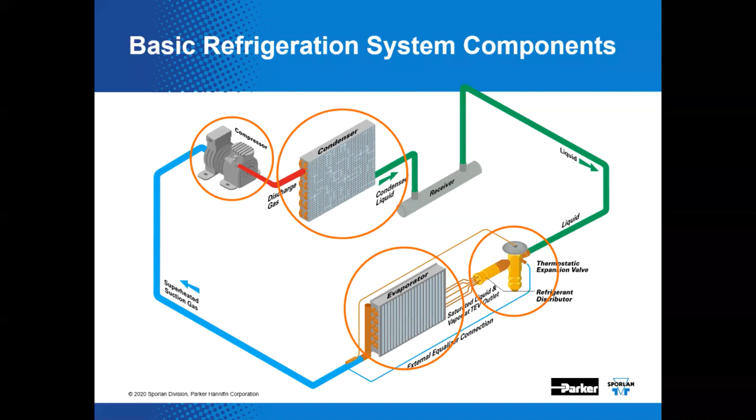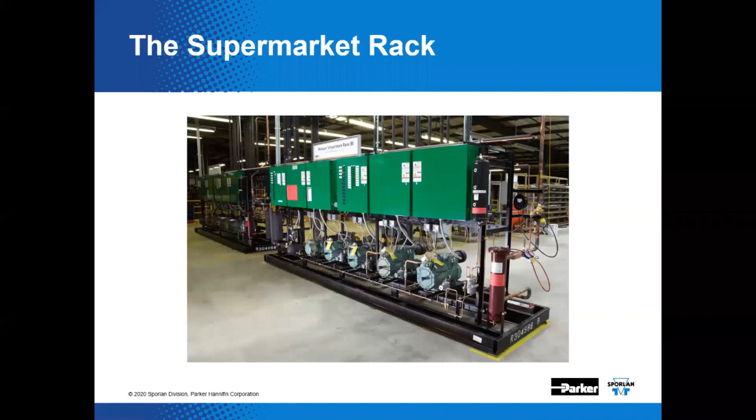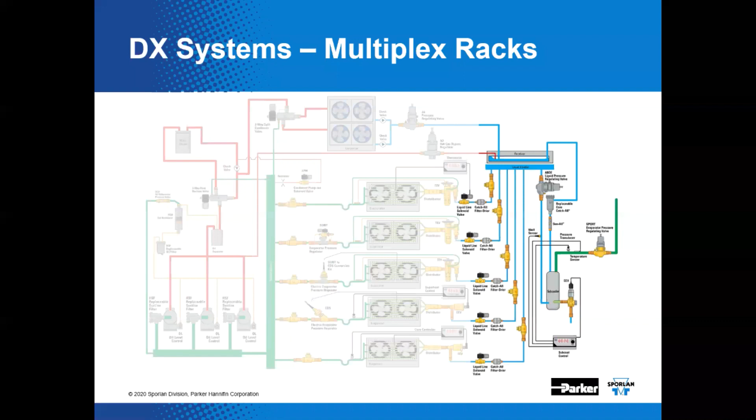Here again is that multiplex system. And right now, we're simply going to highlight the part of the system that we plan to discuss today as we move on to discuss liquid line components in more detail. Downstream from the contaminant control, and here I might go ahead and use the laser pointer, we have a mechanical subcooler. Even though in this particular version we're showing an EEV in the circuit, the term really refers to the mechanical nature of the heat exchanger used in this subsystem and not the flow control device.

The rack's mechanical subcooler is typically a circuit on the rack or another rack at the supermarket. For increased efficiency, the low temp rack will be externally subcooled by a medium temp rack. Note that medium temp rack's not shown in this diagram, just to simplify. But again, using that laser pointer, see the connection to the EEV from the medium temp liquid header, and see the connection from the evaporator pressure regulating valve to the medium temp suction here. This allows the medium temp compressors to help with the low temp load.

The medium temp compressors are typically more efficient compared to the low temp compressors. This is a compression ratio or pressure ratio thing. Most medium temp systems that utilize a subcooler are self-subcooled, as there is still a benefit to the subcooling effect even in this situation.

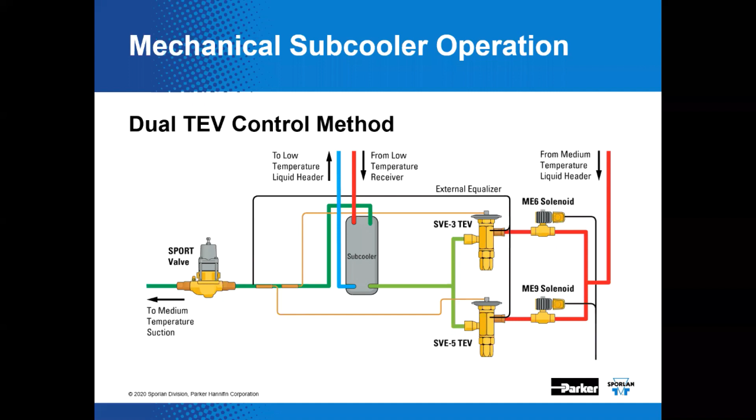Yeah. So I think you could actually throw off valve sizing if you went subcooling too far, too low. I tell you, from what I've seen, 50 degrees seems to be the low end of what makes practical sense in many instances. But there may be times where there's some benefit to go lower than that, but I think you've got to be careful with the selection of all the components that are involved.

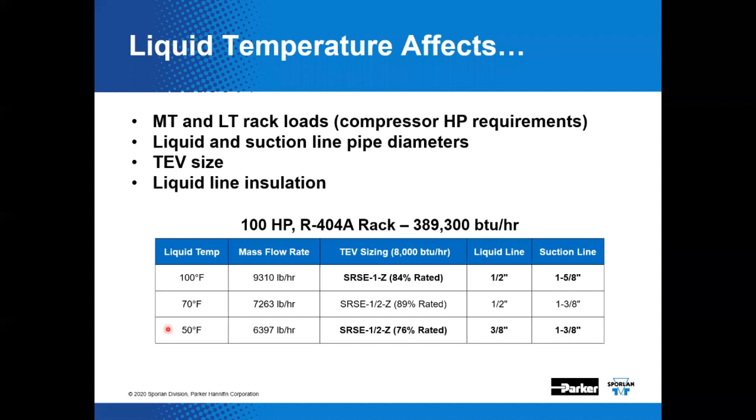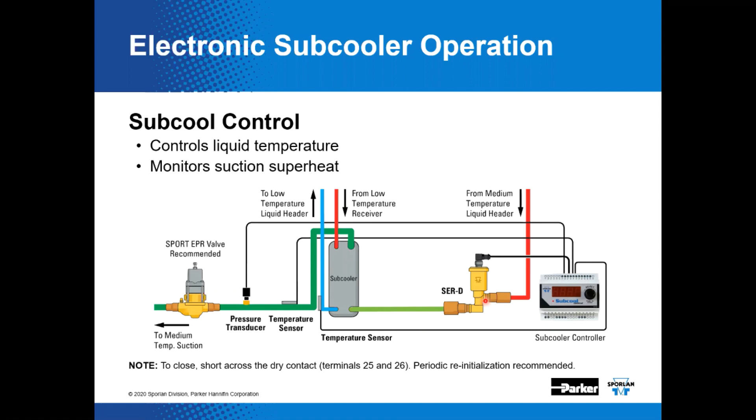There are systems that utilize a CDS in place of the SPORT valve and a mechanical TEV in place of the SER. Generally speaking, you wouldn't necessarily have a CDS coupled with an SER, but I suppose one could do that if you were so inclined.

There's a question: could you have more than one subcooler in a loop? And why would we ever want to do that? The only reason it would make sense to do that is if you did not have a large enough subcooler available to meet that need, and so you have to put two of them in series or two in parallel. But that's really not what we see in practicality. In general, it's just one unit.

And one other question: we're showing liquid from the medium temp rack to subcool the low temp liquid. Could you just not use the low temp liquid to do the same thing? And in fact, we mentioned that earlier. Absolutely, you can. What you end up doing, though, is working those lower pressure, lower temperature compressors to do the work. And generally, they might not be as efficient as the medium temp versions, and you don't get the same kind of cost savings. But functionally, yeah, you could do that.

Sure. So it's all about cost savings using medium temp instead of the low temp, whether it's using low temp suction gas. Well, it's about cost savings and about stable control. It's a combination. Okay.

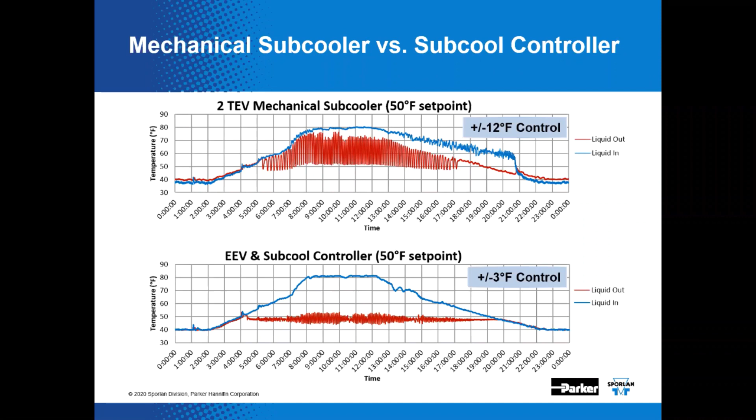Make sure you have the right TEVs that are working properly. Make sure you're pulling the right solenoid on at the right times for the right capacity. And then check that subcool control. And then for the liquid returning back to the compressors, obviously that's a superheat issue. Go take a look at those EEVs and TEVs, and then troubleshoot those as you need to make sure you get it back to proper superheat.

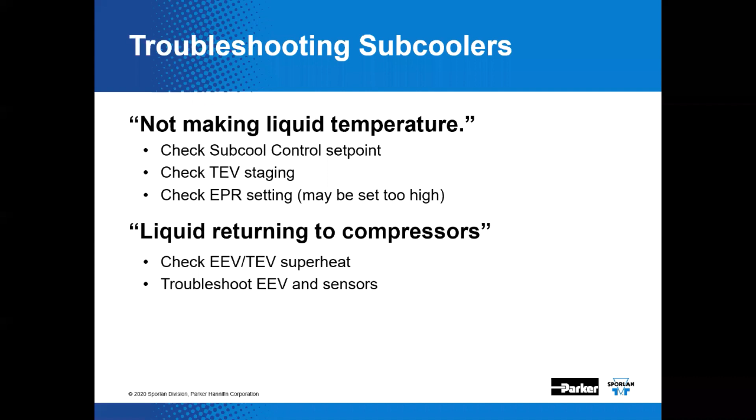Sounds good. We're moving on to the next phase of this tech talk, and here we plan to include a few comments regarding something known as the Liquid Pressure Regulator, or LPR. It's installed in the liquid line to provide consistent outlet pressure to the TEVs. With a steady supply of stable temperature and pressures, setting those mechanical TEVs at the refrigerated case becomes an easier and more reliable proposition.

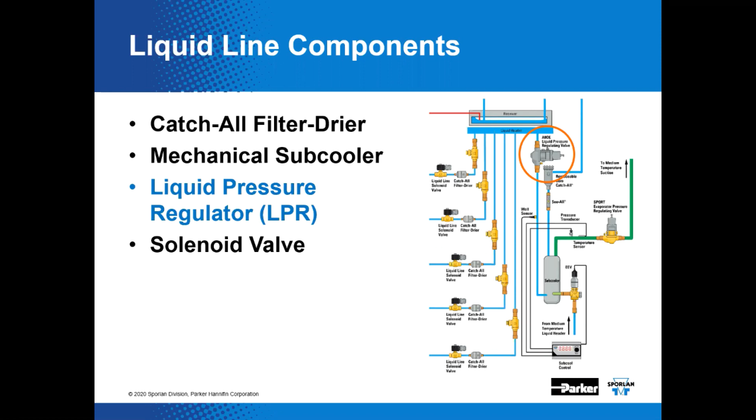You're stacking the odds in your favor of the thermostatic expansion valve's ability to control the desired superheat at the outlet of the evaporator coil, presumably where the bulb and equalizer have been installed, and hence have better stable overall control. There is the LPR indicated there. And sometimes that's referred to as a liquid header pressure regulator, as we'll learn why that might be the case.

This is an overview of the purpose of that valve. Liquid pressures change throughout the year due to ambient conditions. Fluctuations cause TEV loading to change and the TEV to potentially hunt. That LPR is used to minimize liquid pressure fluctuations. And that's where the liquid header pressure regulator moniker comes in. It receives liquid from the receiver and supplies refrigerant to the liquid header and maintains a stable pressure.

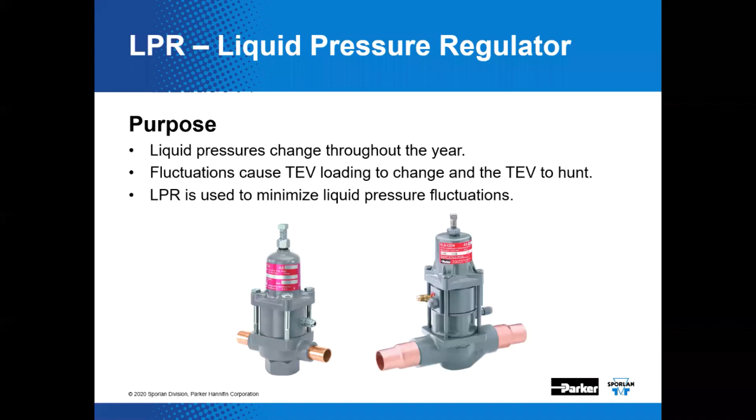Here, while traditional head pressure controls maintain a minimum head pressure to prevent starving the liquid line devices, the liquid header pressure regulator acts to control the peaks of head pressure that might occur in, say, the summer months.

The low percent loading of the TEV that could subsequently occur in the summer months, in the case of this example we show as low as 49%, could result in a flooded condition because the TEV is relatively oversized when that happens. This situation could ultimately be detrimental to system performance and maybe even system life.

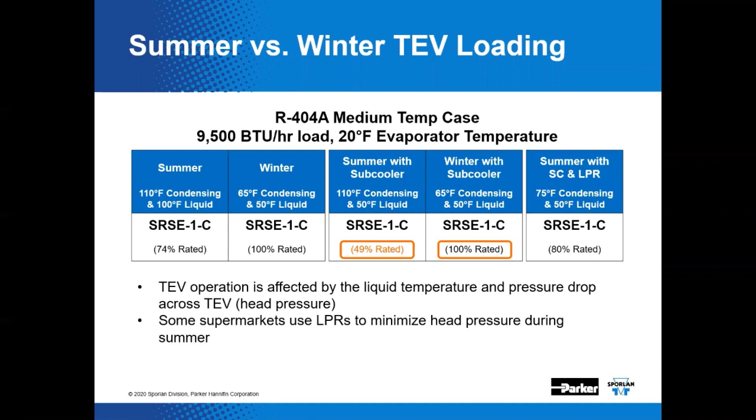Over here, we see winter with a subcooler and the accompanying percent loading. And over here, summer conditions with a, what is that SC there? Subcooler. That's the thing we talked about a little earlier. Yep. And the LPR, the liquid pressure regulator, look at the stable percent loading that we have on the expansion valve in this case. Comparing 80% loading versus 49, obviously the valve's going to operate much better in that sort of range, Jim.